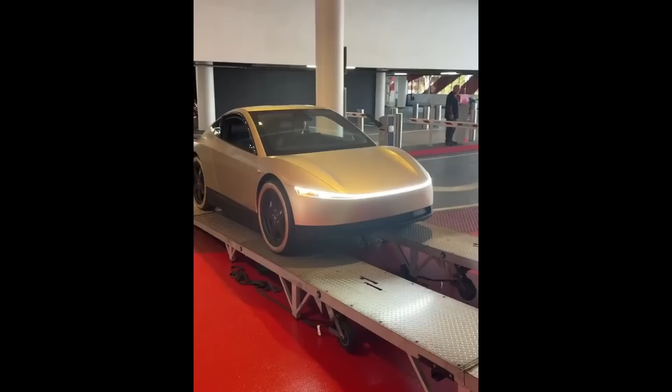Elon says Cybercabs will roll off the line every 5 seconds. That's not hype. In fact, over 2 years ago, I predicted exactly that. Just before Tesla revealed its unboxed process, I said they were about to reinvent the automotive production line, with the goal of building one car every few seconds. At the time, it sounded crazy, but one by one, those predictions were confirmed.

So how is Tesla planning to do what no car maker has done in over a century? And how can a single line outpace 12 conventional ones? Let's break it down. Now buckle up and get ready, because Tesla is about to disrupt the entire automotive industry, and disruptions are never boring.

Chapter 1. Speed is the strategy. When analyzing manufacturing systems from first principles, there's one variable that multiplies the efficiency of every other: speed. Not incremental gains, not 10% better, but a full order of magnitude change.

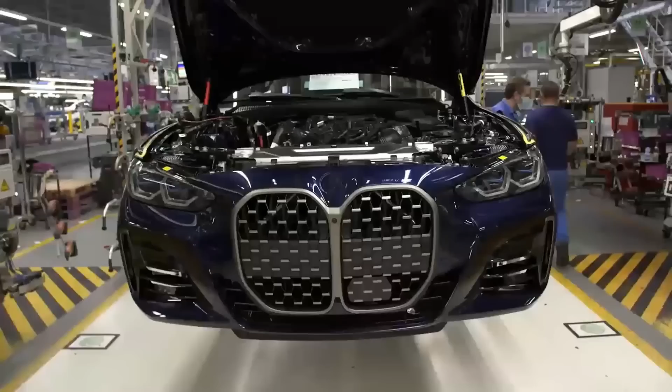In most automotive factories today, one car rolls off the production line every 60 seconds. Surprisingly, despite robotics and changes in technology, that cadence has barely changed since the days of Henry Ford. The limiting factor is the human element, because while machines can be made to go faster, people are limited in how fast they can move, lift, align, and react, without getting injured or making costly mistakes.

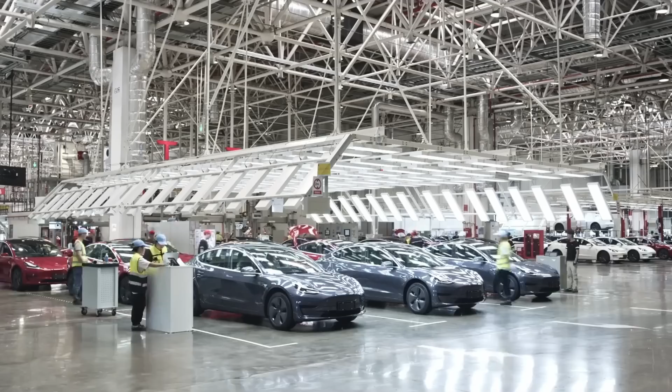Through a lot of painstaking work, Tesla already pushed past that. Yesterday, when I was being interviewed by somebody, I mentioned that a normal car production line is about a 60-second cycle. Tesla is doing a 40-second cycle in China. Well, I've been corrected. That is really a 34-second cycle for the body shop. Nobody can do that. And Giga Shanghai makes a new Model Y every 34 seconds. Nearly twice as fast as the industry norm.

But now they're going for something that sounds impossible. At a recent all-hands meeting, Elon revealed that the Cybercab line is being designed to build a car every 5 seconds. Let that sink in. That's 12 times faster than a conventional car factory. It means one Cybercab line replaces 12 traditional ones. And it raises the core question of this video. How is that even possible?

The answer starts with the architecture of the production line itself, what Tesla calls the unboxed process. Traditional factories build cars sequentially, one vehicle, moving station by station along a single winding line. Tesla threw that idea out.

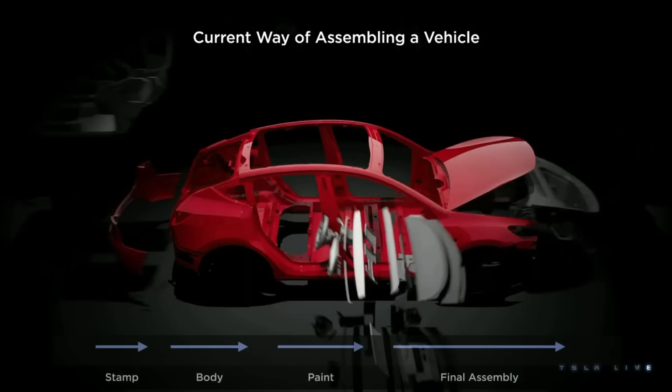There are many steps in learning, and Tesla has made several before coming up with the unboxed idea. Starting from the traditional production line, Tesla's lines are already built as a grid of adjacent cells. This enables duplicating cells and opening parallel stations for the same process. For example, when trying out a new method, a main cell can handle most cars, with just a few routed to a new experimental one. As the new method improves, more cars are diverted until it takes over completely.

With the unboxed method, Tesla pushed this parallelization to the max, not just within a cell, but across entire sections of the vehicle. Instead of building the whole car in a line, they broke it into large modules, each built in parallel inside its own production cell. One cell handles the rear, another assembles the center, a third builds the front. And it doesn't stop there. Each module is composed of sub-modules, themselves built from smaller assemblies.

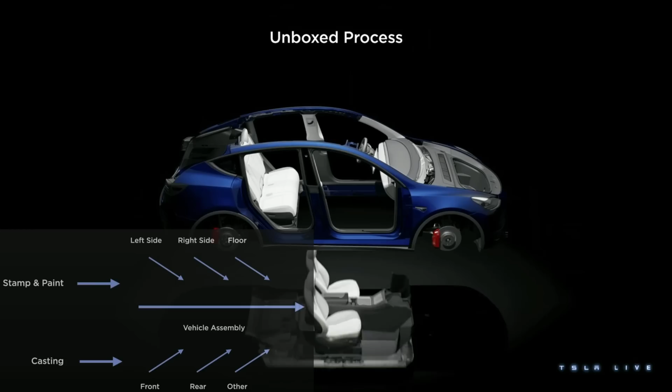At every level, Tesla applies one simple rule: only connect components at the last stage where they're needed. When a part becomes an assembly, it's tested. That assembly joins others to form a sub-module, and tested again. Sub-modules form larger modules, and tested once more. And only then, in final assembly, are all major modules snapped together, mechanically, electrically, and digitally, into a complete vehicle.

This layered test-before-merge structure makes true parallelization possible. It ensures any failed part is caught early, discarded quickly, and never holds up the rest of the system. It's no longer a line, it's a grid, or better yet, a multi-core processor.

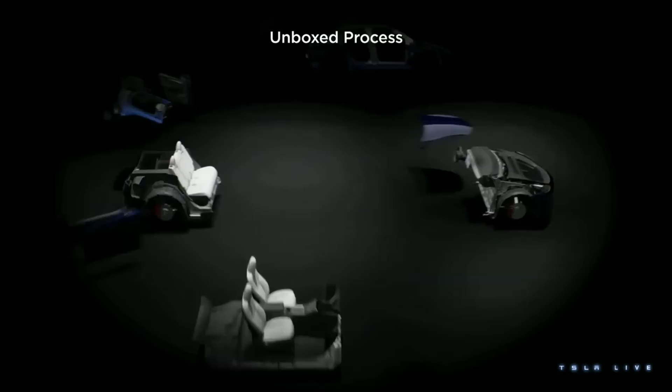Legacy factories operate sequentially like old single-core CPUs, but with Cybercab, each core builds its section independently, only returning to the sequential bottleneck when joining complete parts. That parallel architecture is what makes 5-second production cycles even conceivable, and it unlocks some game-changing advantages.

First, capital efficiency. A line that produces 12 times as many cars doesn't need 12 times the machines. That means more output from the same equipment and far lower capex per vehicle. That alone transforms the economics of EV manufacturing.

Second, spatial efficiency. Traditional plants require enormous footprints to support long assembly lines, but parallel module production shrinks the layout dramatically. Tesla can fit multiple lines into a single building, or build smaller, more localized factories worldwide. Fewer factories means even lower capex per car.

Third, quality control becomes embedded. Legacy systems test the car after full assembly. If something fails, it means disassembly, backtracking, and costly rework. In Tesla's system, each layer is validated before it moves on. A failed part doesn't enter a module. A failed module never reaches final assembly. Defects are isolated and removed without disrupting the flow.

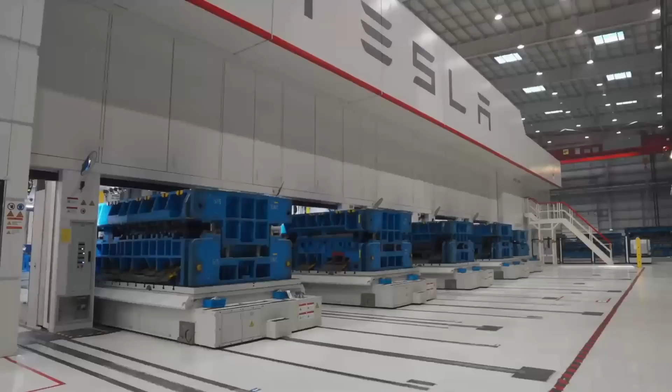And fourth, perhaps most radical, complete automation. At a 5-second pace, humans can't be involved. As Elon clearly said, the line will move so fast, actually people can't even get close to it. He wasn't exaggerating.

A human simply can't align, fasten, and inspect a structure in 5 seconds, let alone do it safely and repeatably. Cybercab's production line is being built for robots from day one, with industrial robots doing most of the work and Optimus doing the rest.

Like the parallel production cells used in Models 3 and Y, the structure allows multiple robots to test different ways of doing a job, before settling on the best method. But unlike single cells, a slow cell doesn't delay an entire vehicle, just a module or subassembly. That keeps delays localized and makes Cybercab's line an ideal proving ground for robotic labor.

Elon compared the Cybercab line to a high-speed consumer electronics line. That's not a metaphor. Electronics factories run fast, dense, and error-free. Tesla is importing that logic into automotive, something no legacy manufacturer has done.

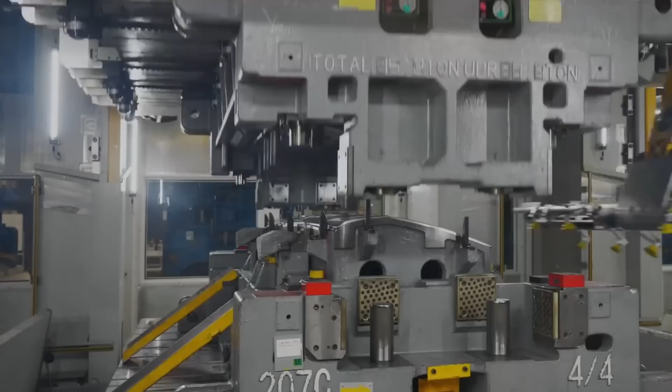For me, the 5 seconds announcement was redeeming. Two years ago, just before Tesla revealed the Unboxed process, I released a series of videos predicting they wouldn't just build a cheaper car. They'd reinvent the production line itself, aiming to roll out a car every few seconds. It wasn't out of the blue.

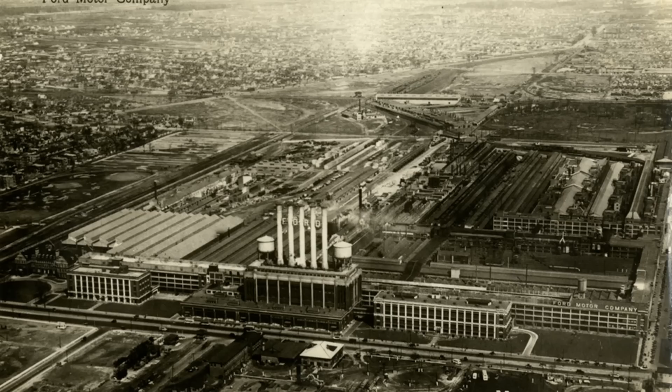One of my patrons, Scott M., sent me this: I noticed an interesting parallel between 1913 Ford's Highland Park manufacturing plant and the naming of Tesla's Project Highland. Coincidence? I think not. Elon is an avid student of history, so to me the connection seemed obvious.

Highland Park was the name of the factory where Henry Ford introduced the moving assembly line and defined how cars would be built for the next 100 years. And Project Highland was Tesla's attempt to reimagine how cars will be built for the next 100. At the time, this was a moonshot. Shortly after, it was confirmed.

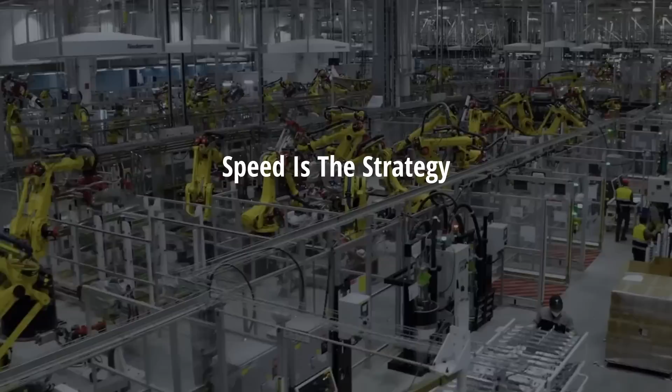With Cybercab and any car Tesla makes in the future, speed is the strategy. Because speed is scale, and scale is dominance. Every innovation we will cover in this video, from dry processes and castings to modular interiors, simplified wiring, and humanoid robots, serves this one goal: to make a car every few seconds.

The Cybercab isn't just a new product, it's a showcase for a new industrial model, one that could upend everything we know about vehicle production. And in the chapters ahead, we'll break it down piece by piece.

Chapter 2, the dry factory. When trying to speed up a process, fluids are your enemy. They require special storage, special handling, special ventilation, and special disposal. Paint, glue, hydraulic fluid, they all require time to flow, to dry, to bleed, to cure. They introduce dependencies, delays, and points of failure. And when you're trying to build a car every 5 seconds, that's a non-starter.

Tesla knows this, so I expect them to go almost entirely dry. Let's start with the most obvious: no paint shop.

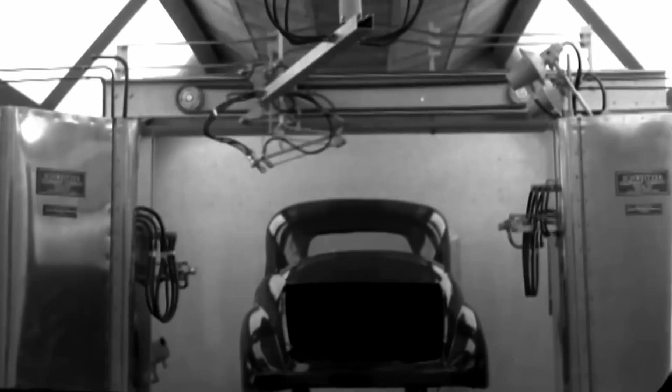Legacy automakers spend hundreds of millions building massive clean rooms to spray cars with layer after layer of primer, paint, and clear coat, each of which needs to dry before the next begins. It's slow, messy, and expensive.

Cybercab skips all of that. Instead of painting body panels, Cybercab uses color-impregnated plastic for most surfaces and leaves its massive castings unpainted. It's a radical change that slashes both cost and complexity, while opening the door for faster, more localized production.

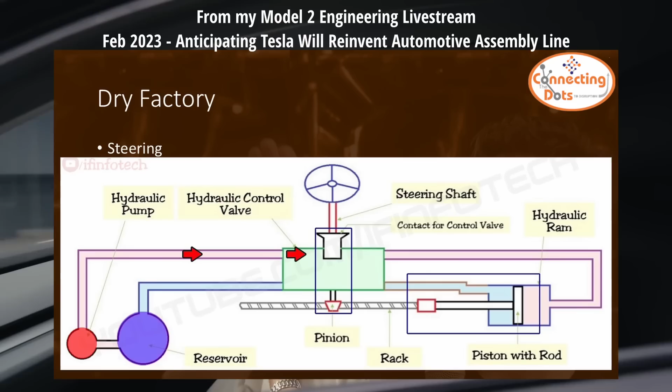Then, there's steer-by-wire. Like all Teslas and most modern cars, Cybercab will have electric steering, which consumes less energy than hydraulic steering and doesn't require steering fluid. The Cybertruck was the first vehicle in the world with full steer-by-wire without using a mechanical steering column. Instead, it uses electronic signals to control the steering angle, with variable ratio assistance that adapts to speed and driving context.

Cybercab builds on this. As an autonomous car with no steering wheel, steer-by-wire is the only option. But in Cybercab's case, even if it had a steering wheel, they would have still used steer-by-wire. Because with steer-by-wire, there's no need for a steering column, no firewall cutout, no mechanical interface between the front module and the rest of the car.

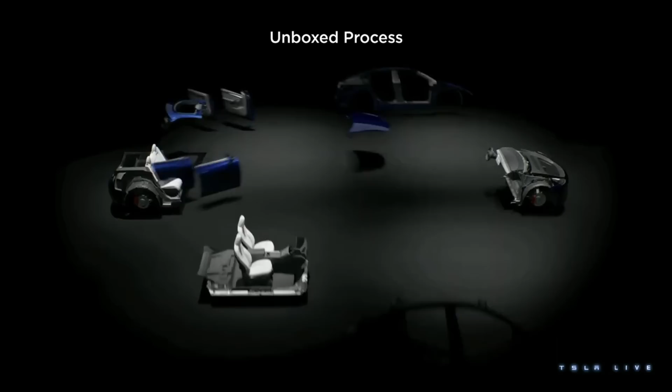That's not just elegant, it's essential. It means the front can be developed, built, and tested as a separate module, with nothing tying it to the center or rear. Removing dependencies between modules is the very essence of unboxed modularity.

Brake-by-wire follows the same logic. Tesla hasn't released many details about Cybercab's braking system, but Lars Moravy confirmed that brake-by-wire is already being used on the new Model Y. We have a pedal simulator in the front here, which is kind of like a traditional master cylinder.

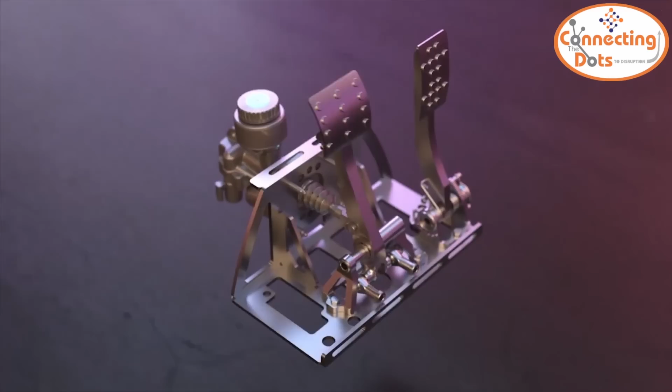When you're pushing the pedal, you're pushing straight into a master cylinder, and then we have a spring pack that we can calibrate to give you a nice pedal feel. But the brake pressure is not actually going to the wheels like in a traditional system. Instead, we read the pedal stroke and then send a signal to our ECUs, which then create pressure requests that we create on the front calipers here.

Now the way we do that is with electro-hydraulic actuators, and they basically have a little piston that pushes in and replicates what you would normally be doing, which is the master cylinder pushing pressure straight to the wheels. So it decouples the driver from the wheels, which allows us to do a little more control, and it also gives the driver a very consistent feedback from the pedal and a very comfortable feedback.

The car uses a hybrid setup, with local hydraulic actuation for familiar pedal feel. But for Cybercab, a car with no brake pedal and no need to match the slowing with brake pedal feel, there's no reason to keep even that.

This is really interesting because this is taking it even a step further. So not only is the driver decoupled, but you're in a situation where you have no hydraulic fluid in the back. They're electromechanical, and it's just a motor that pushes in a piston, and that puts the brake pressure on the wheel. So this is really good because now you're not running any hydraulic fluid, there's no bleeding process to do.

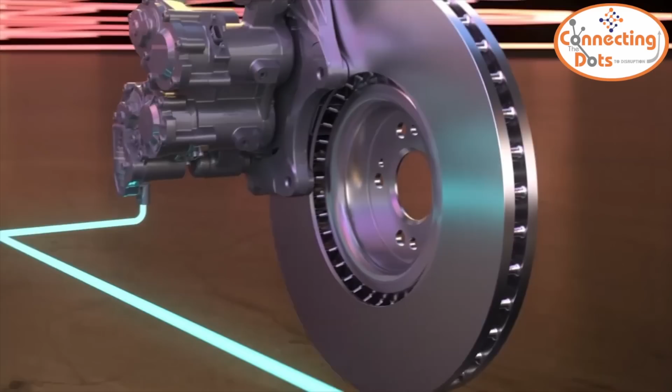We can integrate your parking brake directly into that system. Very compact, very easy to package, but then you still get the individual actuator control on every single wheel. So again, two controllers back here, two controllers up there. You're gonna get the best possible control and best feel out of the vehicle.

Lose the hydraulics, and you lose the need to bleed lines, calibrate manually, or stretch hydraulic lines along the car. Each section of the car becomes a self-contained module. You build it, you test it, and you plug it in. No leaks, no mess, no waiting. So no paint, no steering rack, and no brake pedal.

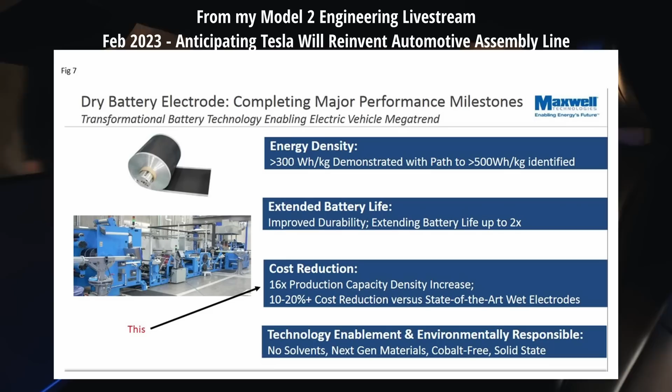But dry factory doesn't stop there. Tesla is also going dry inside the battery. Their new dry electrode process eliminates the solvents used in traditional battery cathodes and anodes. Moreover, it eliminates the drying time and space required after using these solvents. The dry battery electrode process is not only a win for the environment, it shortens production time, shrinks factory footprint, and enables Tesla to produce battery cells in a fast, clean, and scalable way.

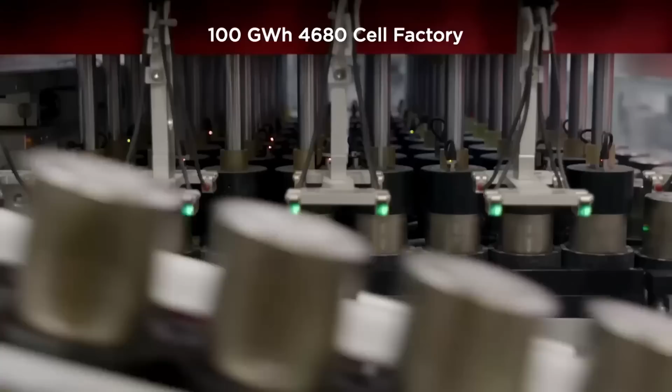In traditional processes, battery slurry, made from active material, solvent, and binder, is coated onto metal foil and then dried in huge ovens that can span tens of meters and consume massive energy. Tesla's dry process, inherited from their acquisition of Maxwell Technologies and further developed by Tesla, instead compresses powdered materials directly onto the current collector via a roll press.

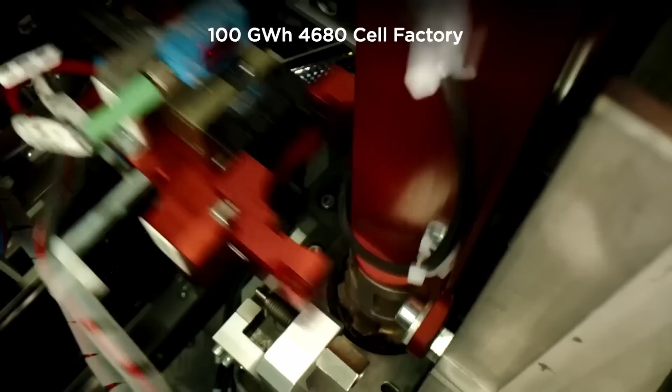No solvent, no drying, just roll, cut, stack. It allows cell lines to be shorter, faster, and far easier to scale. We'll discuss castings in the next chapter, but they too are part of the dry factory, because having one large part replace dozens of small ones joined together saves a whole lot of glue and sealant, along with their drying times.

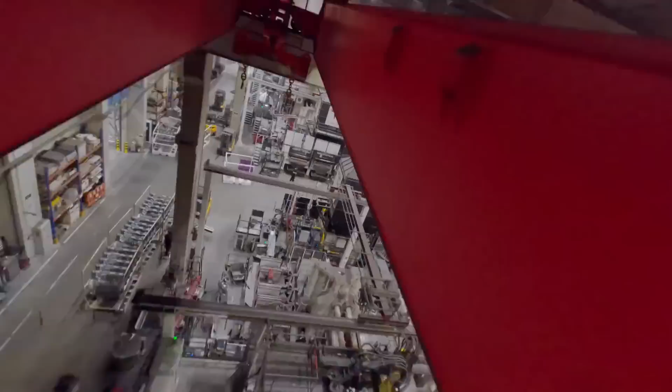Once I predicted Tesla would reinvent manufacturing, it was clear that the goal was speed. Knowing workshops and going by first principles, the first thing that stood out was fluids are slow, dry is fast, and stretching hoses along the car is tedious.

Let's see how it turned out. This isn't a victory lap, just a quick check on what I got right, what I got wrong, and what we're still waiting on. No paint, confirmed by Lars and Franz.

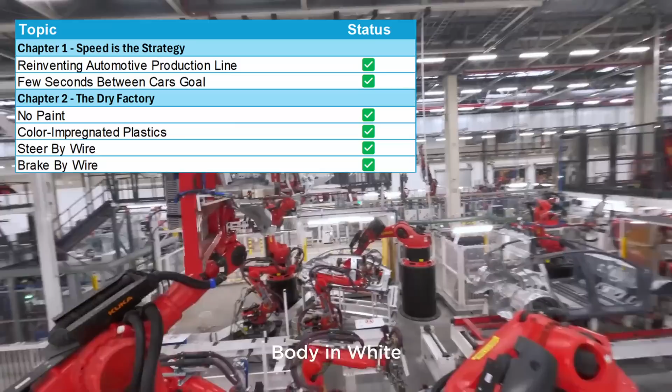Color-impregnated plastics, also confirmed. Steer-by-wire, shown on Cybertruck and essential for a car with no steering wheel. Brake-by-wire, confirmed on new Model Y, and with no pedal in Cybercab, it is a must.

Dry battery electrodes, Tesla nailed cathodes, and anodes are coming. Fully dry brakes, still a maybe. We'll discuss castings in the next chapter, as they serve far more than just dry factory.

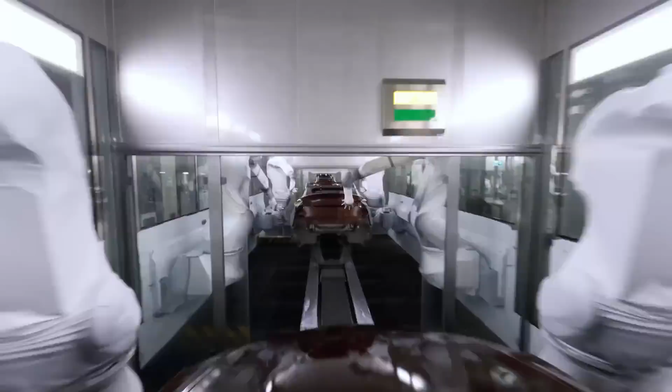While going dry removes critical bottlenecks from the production process, achieving the 5-second goal takes far more than just removing fluids. For that, Tesla had to fundamentally rethink how the car itself is constructed, starting with its very skeleton.

Tesla used Cybertruck to validate new technologies for Cybercab, and Cybertruck is now having a recall. Recalls are common, but without adding, for example, that the F-150 Lightning already had 3 of them, media outlets just tell stories to fit their agenda.

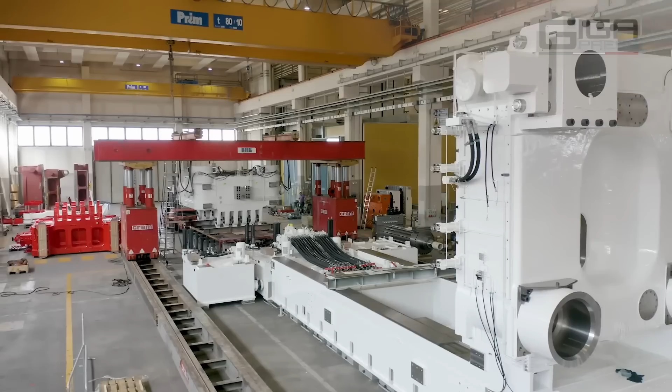Each casting replaced around 70 stamped and welded parts previously used to form that part of the chassis, along with eliminating the processes involved in making and joining them together. That innovation soon evolved into a single-piece rear GigaCasting, unifying the entire rear structure into one massive aluminum element. Later, Tesla added a front casting to replace much of the subframe and shock tower region.

The front casting appeared on Model Y and spread to the Cybertruck, but on the new Model Y, Tesla stepped back and removed it, reverting to previous methods of making the front structure.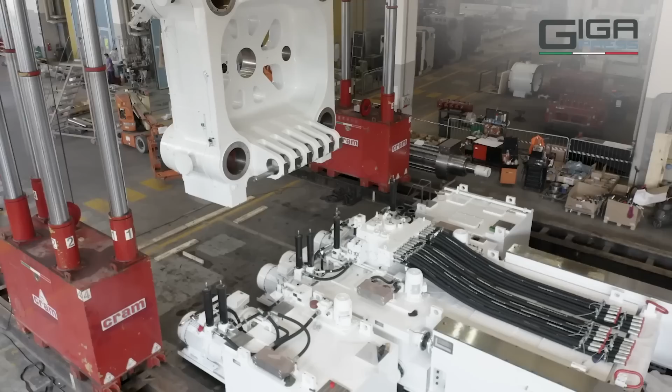But if Model Y ditched its front GigaCasting, will Cybercab use one? I think the answer is yes, and for 3 reasons. First, Model Y dropped it not because of limitations in performance or manufacturability, but simply for commonality. Not all Tesla factories had front gigapress capacity, and rather than maintain separate production processes, Tesla chose to standardize.

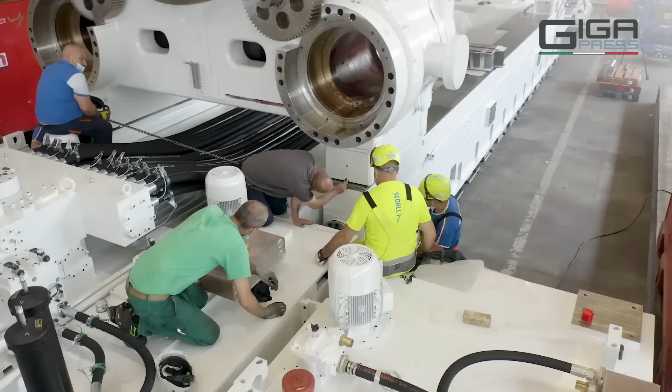That constraint disappears with a clean sheet program like Cybercab. Second, in an unboxed production system, each casting isn't just structural, it's the foundation of a standalone module.

With high-precision castings, the casting itself can serve as a jig for the entire module, eliminating the need for expensive production jigs. And third, and most importantly, casting is simply much faster. Compared to stamping, aligning, welding, gluing, and sealing dozens of smaller parts, a single-shot casting is dramatically quicker. It also saves factory space, requires fewer robots, and most of all, saves time.

Tesla isn't just building faster cars. They're building cars that can be built faster, and these castings are where it starts. But front and rear castings are just the beginning, because even castings can be improved.

As Elon said at the all-hands meeting: 'And we rock at castings.' 'We do.' And if so, what's next?

Can you imagine a car coming off the line in less than 5 seconds? That's like, whoa. Which means casting's got to happen fast. Tesla is making the casting process itself faster, cleaner, and smarter.

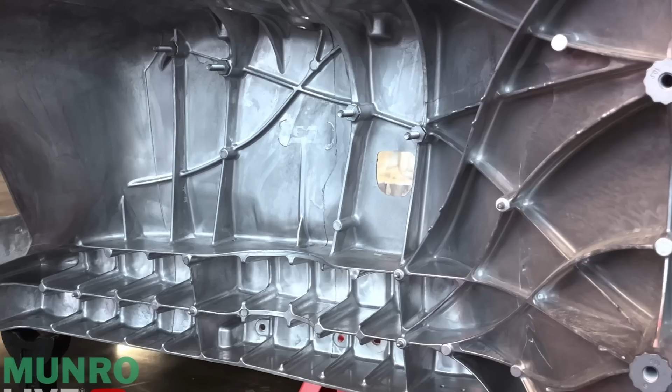And I see two main improvements arriving, the first of which we already saw with Cybertruck. Tesla is reshaping how the metal flows inside the mold. Using in-house developed software which combines structural analysis of the final casting with computational fluid dynamics for the molten metal, they redesigned the flow channels and internal ribbing of the die itself.

The result? Instead of old-school rectangular ribs and blocky transitions, Tesla's castings now feature organic, flowing structural patterns, shaped to enable easier flow of the liquid metal.

This change does two key things. It reduces turbulence and voids during injection, and it enables larger, more complex parts to be cast using smaller, lower-pressure machines. That may sound minor, but it's a breakthrough.

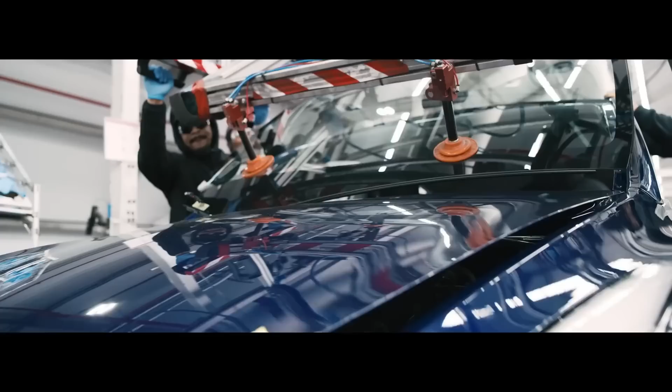Instead of scaling brute force, Tesla scaled fluid dynamics, and the benefits go far beyond part geometry. Smaller die casting machines take up less factory space. They're cheaper to buy, easier to install, and reduce capex per vehicle. They're made by more suppliers, not just IDRA, so they're easier to procure and scale.

They consume less energy, lowering production costs. And perhaps most important, they cycle faster. Smaller machines typically have shorter stroke lengths, lower thermal inertia, and faster reset times. That means less delay between shots and more parts per hour.

So even if Cybercab's parts are physically small, the benefit of using smaller, faster machines is massive. It's a classic Tesla move: optimize the bottleneck and then build around it.

Now let's focus on the cooling, because that's where the real speed unlock happens. Casting's got to happen fast. So I mean, we got to jam the liquid metal in, cool it down real fast, like real fast.

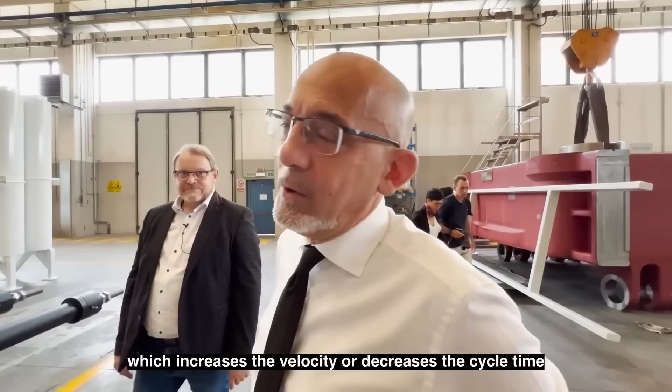In a tour of the IDRA factory, one of the engineers told Sandy Munro that Tesla was attempting to improve cooling speed. And it wasn't just talk, because in a later factory tour, 2 gigapresses were spotted, each with a different cooling stack above it. One original, the other an experimental Tesla-developed stack with which they experimented on achieving much faster post-injection cooling.

And that makes perfect sense, because if you want a car every 5 seconds, you can't have a part sitting for 45 seconds just to cool off. The entire cycle needs to shrink, and for that, thermal control is king.

This is where Tesla truly shines. From its experience with battery packs and EV heat pumps, to the 3D cooling they developed for Dojo's chips, Tesla has become quite a world leader in liquid cooling solutions. So applying those skills to aluminum castings?

Hold our beer. Tesla is likely doing 2 things here: actively managing the heat draw from the mold using liquid-cooled channels embedded around high-temperature zones, and reclaiming part of the thermal energy to preheat or even melt the aluminum feedstock for the next cycle. Instead of wasting heat, it's a sure bet that Tesla loops it back in, a thermal feedback loop for casting.

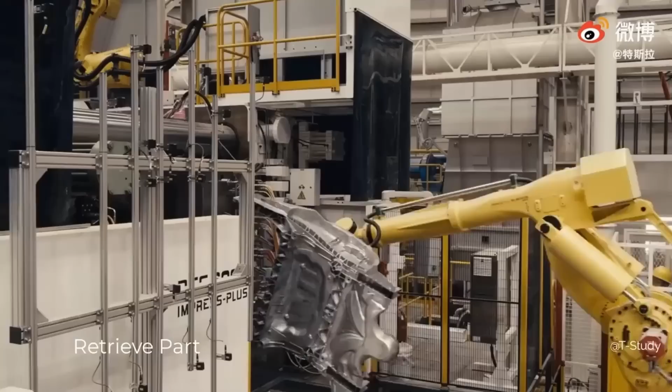Which takes us to simplifying. Casting isn't just about what happens inside the mold, it's also about how these giant metal pieces are extracted, and what happens until they are used in a subsequent station.

In previous videos, I showed the robotic dance between extracting, trimming, inspecting, and transferring, and noted that, although this was sufficient for the current factory speed, if Tesla moved to a car every few seconds, they will likely reduce the required post-processing, and will have to simplify the process so that each arm performs no more than a single move, immediately freeing it to handle the next part. And Tesla seems to agree.

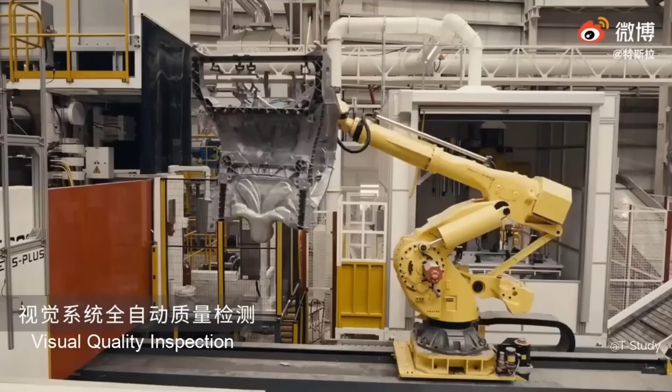Lars Moravy recently confirmed that the post-casting processing on Cybercab has been significantly reduced. For 5 seconds per car, there's no way a single arm would be used for so many steps. So instead of having robot arms shuffle castings between multiple stations, Tesla may now combine those steps, casting, cooling, cleaning, inspecting in one continuous motion.

Then there's the upper chassis. Before Tesla's 2023 Investor Day, I predicted that Tesla would cast, forge, or mold the top half of the car in composite form, embedding wiring, skipping paint, and radically simplifying roof and pillar assembly. Turns out, that prediction landed pretty close. Lars later confirmed that Tesla is casting the upper chassis, but instead of a single large top hat, they are making two composite castings, one for each side, connected afterward. Why two instead of one?

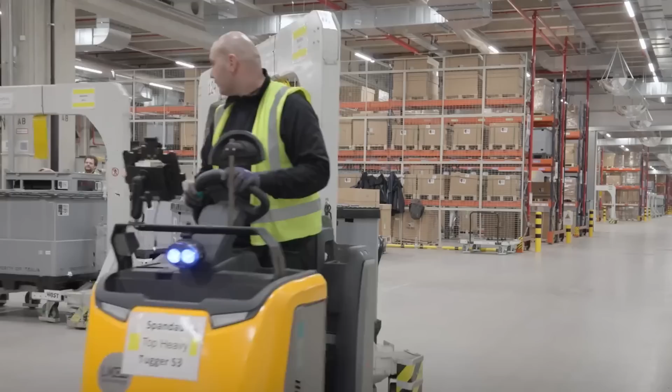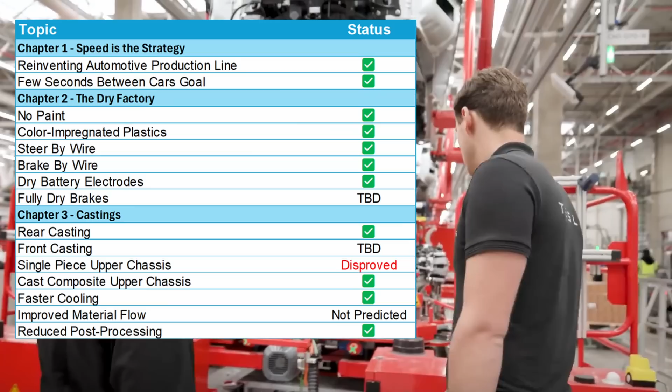This one I didn't predict, and hats off to Tesla. Reduced post-processing, confirmed by Lars. Tesla has reduced the steps required after casting. Heat reclaim, still unknown, but a very likely optimization based on Tesla's track record. Simplified robot movement, still unknown, but also a very likely optimization based on Tesla's track record.

Tesla isn't just scaling castings. They're recasting the role of casting itself. They started as simpler, more precise alternatives to hundreds of parts and processes, but they continue as a major enabler of speed and of robotaxi's global scaling.

Chapter 4: Snap Fit Car. If castings are the bones of the Cybercab, then its real breakthrough lies in how everything else connects. Because in traditional car factories, assembly is construction, hundreds of pieces coming together, layer by layer, in a long, slow sequence. But with Cybercab, assembly becomes something different. It becomes integration. That's the real genius of the unboxed approach.

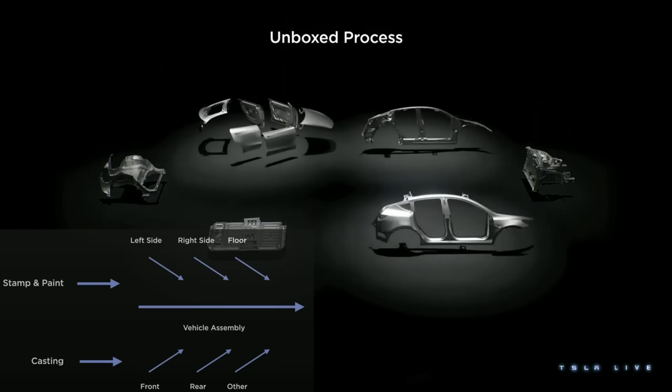Rather than building the car one step at a time, Tesla builds it like a computer, modular blocks developed and tested independently, then snapped together in one final step. Each major system in the car becomes a self-contained module.

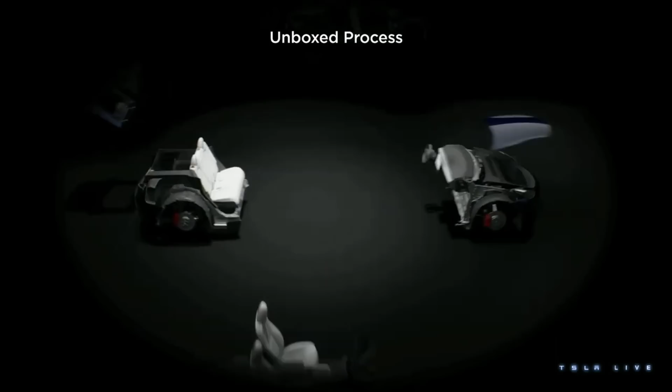The battery is no longer just an energy source. It's a structural floor with embedded cooling and high-voltage distribution, and it holds much of the interior, such as carpeting, seats, center console, and HVAC, pre-installed and fully tested. The front and rear castings serve as drop-in motor and suspension units, with mechanicals, electronics, and thermal systems already integrated. The roof panel should arrive fully trimmed, wired, and sealed, with no need for extra brackets or secondary alignment steps.

Each module is built in parallel, each one is tested on its own, and each one adheres to a strict known interface. Only after they're independently tested do they come together at the merge station, like IP blocks in a chip layout, forming a single unified system. That final assembly isn't construction, it's convergence, and it only works because Tesla pre-designed the interfaces.

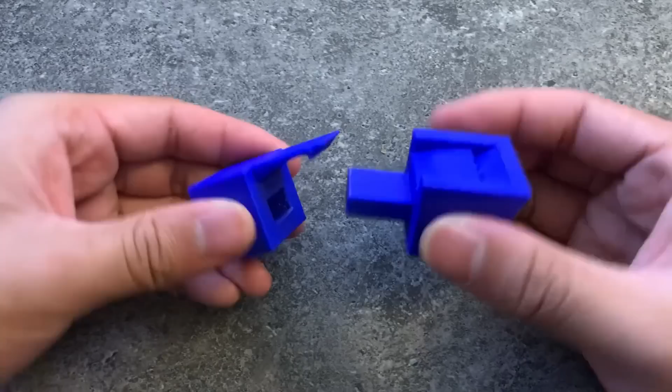Rather than dealing with bundles of cables, scattered bolts, and human-guided alignments, Tesla designed Cybercab's modules to connect via snap-fit mechanical and electrical interfaces. Predetermined hardpoints align each module to within millimeters, and as parts are brought together, they automatically lock in place. High voltage and data connectors engage automatically as modules click into place. Fastening is handled by robots. While Model Y requires hundreds or even thousands of welds, fasteners, sealants, and structural adhesives, Cybercab uses just enough to lock modules in place, trusting precision and repeatability to do the rest.

This architecture opens something new: parallel quality assurance. Because when each module is complete and testable on its own, Tesla no longer needs to wait until the car is fully assembled to check for defects. Each system, drive, thermal, electrical, structural, can be verified in isolation. All that's needed is to plug into the power and data sockets, provide power and data, and check the module's performance.

All this is performed at an early stage, in parallel to other modules and subassemblies. And since failures are caught early, they don't cascade. A bad harness in the front module doesn't hold up the interior or the rear. Everything is modular and swappable, and with tight manufacturing tolerances, the modules don't just fit, they self-jig.

The casting becomes the fixture, the battery becomes the floor, and everything else aligns from there. This makes robotic construction so much easier, even without humanoids. Because when parts self-locate and click together, you don't need a line of workers nudging, tightening, or correcting alignment. You need simple robots that can insert, engage, and move on.

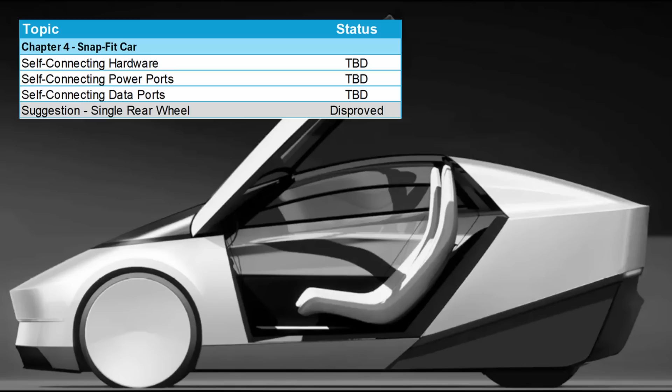Based on early Cybercab concept images which showed an inboard rear wheel, I suggested the possibility that Cybercab will have a single wheel at the back. This was just a suggestion, not a prediction, but clearly it was wrong.

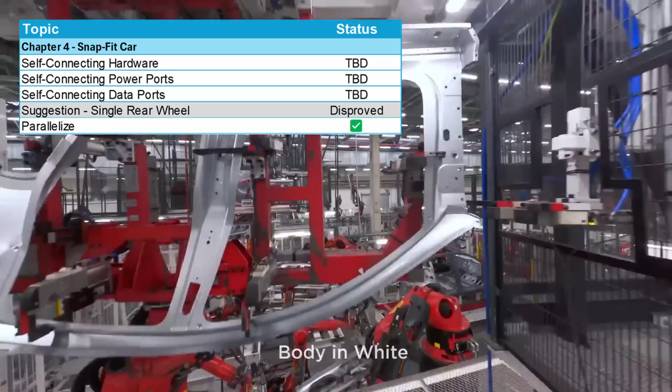And I correctly predicted that Tesla will reduce dependencies and embrace parallelization. But I wasn't nearly bold enough, as the unboxed process is far more parallelized than I had imagined. So kudos to Tesla for their engineering imagination.

And with that, let's move to the interior. Chapter 5, the central module, an interior revolution. The unboxed construction method has the car built in 3 independent modules: front, center, and rear. The center module is built on top of the battery pack and contains most of the occupant's surroundings.

There's a good chance you already know the familiar features, such as mounting the carpeting and seats directly on the battery pack. So let's jump to more exotic elements, starting with the seats. Tesla has filed several patents over the years aimed at simplifying and optimizing seat design, and 2 of them are particularly relevant. First, Tesla's skin foam architecture for seating.

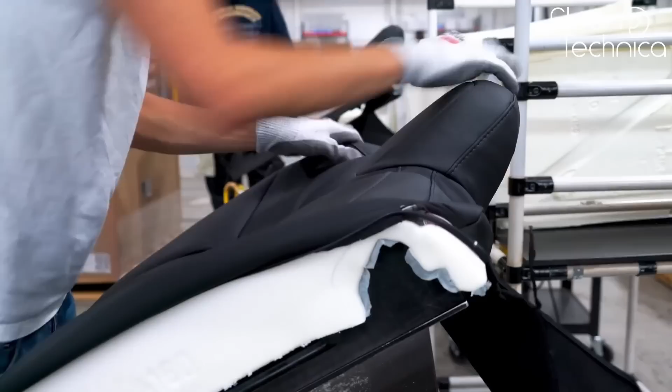In a typical car, each seat includes a frame, layers of foam, and a stitched outer cover. Fitting them together is very labor-intensive, and in high-volume manufacturing, labor equals time, and time equals cost. Optimus can replace human workers and do this work without tiring. But the best process is no process, and Tesla found a better way.

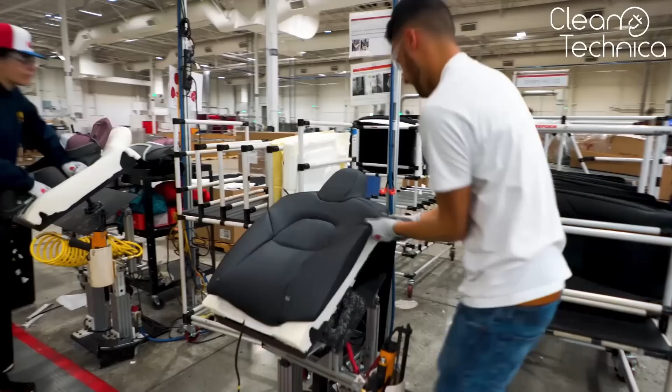Tesla's patent combines the upholstery and foam in one step. The outer skin is placed into a mold shaped like the final seat. Foam is then injected or expanded behind it, adhering directly to the back of the skin and forming a single integrated structure. No stitching, no wrapping, no manual alignment. The result is a clean, minimal single-piece seat that cuts parts, weight, variability, and speeds up build time.

But will Cybercab use it? I haven't seen the seats in person and nobody commented on this, so for now, it's to be determined. And I don't have the manufacturing and durability data required to seriously predict whether Tesla will use it. As a gut feeling, however, unless curing takes too long, I think they will. The potential for production time savings is too big to dismiss.

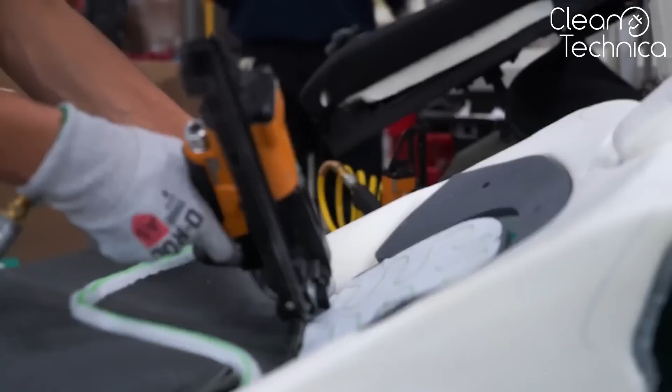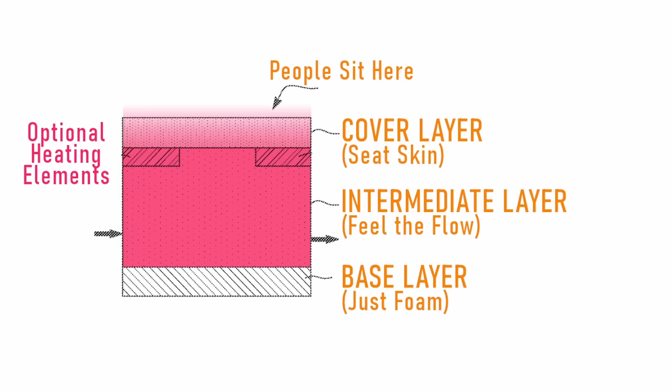Now for Tesla's heated and cooled seat patent. Most heated seats use resistive wires embedded in the seat cushion, and seat cooling typically relies on ventilation fans under the cushion, which is better than nothing, but uneven and noisy. Tesla proposes a liquid-based heating and cooling loop embedded in the seat. Heated or cooled liquid flows through an internal layer in the cushion, delivering thermal comfort directly to the occupant, much like resistive wires. It's quieter, more consistent, and more efficient, important for EVs.

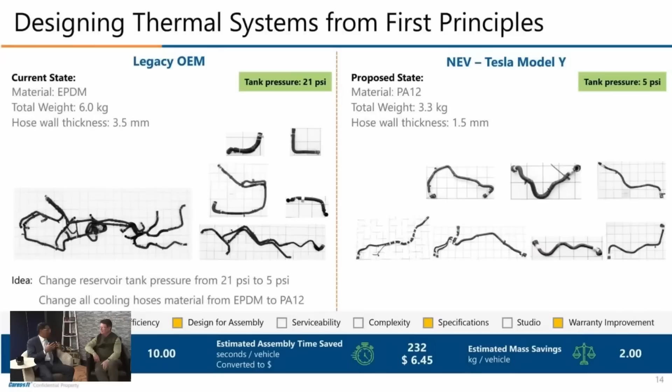Again, no confirmation yet. The seats lack perforations, which suggests no ventilation fans, but liquid-based contact cooling could still be used. Since Cybercab seats sit above the battery, fixed in place, a self-contained thermal loop could make perfect sense, especially if integrated with the main thermal system and octovalve, enabling near-free heating or cooling. An autonomous Cybercab has different needs than a private car. With no driver, the cabin is no longer shaped by traditional controls.

That means no steering wheel, no turn signal stalk or buttons, no pedals, no mirrors internal or external, no rear window, and no driver's display or heads-up display, because why should the left side passenger get more displays than the passenger on the right? All of these are gone in recent prototypes, and Tesla also removed the glass roof.

Removing these is more than a cost decision. Some changes also save weight and even lower aerodynamic drag. More important for Cybercab, however, is that ditching these items shortens production time, lowers factory space requirements, and reduces dependencies between the car's modules. Let's briefly check what I got right and what I didn't.

Predicted no steering wheel, pedals, or mirrors, and these were confirmed. No rear window, also confirmed, and Tesla also ditched the glass roof.

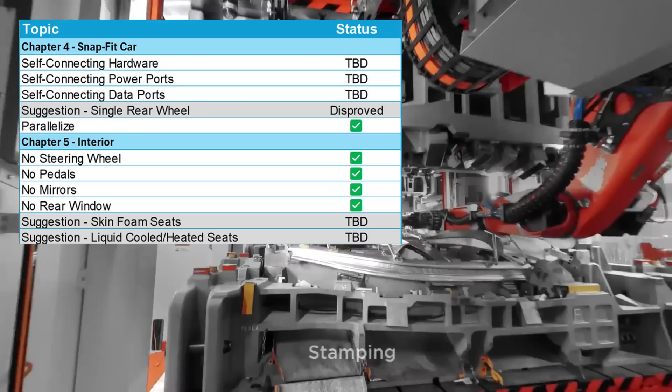Skin foam and liquid seat cooling weren't predicted, just flagged as possibilities, and in both cases we'll have to wait and see. As for a heated or cooled frunk for food delivery, I suggested it as a possibility, feeding straight from the thermal management system. But Tesla skipped the frunk entirely.

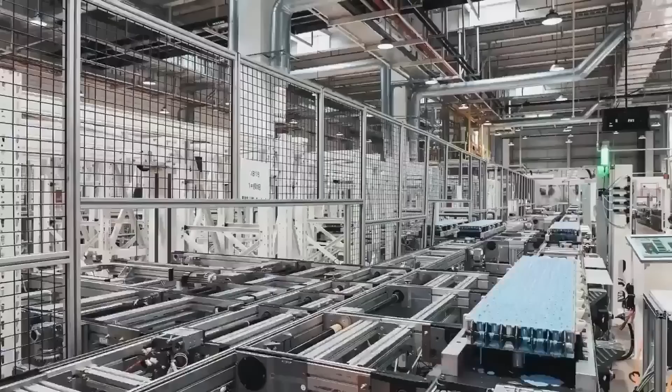Chapter 6. The Nervous System. When cars became electrified, most people focused on the batteries, motors, or sensors. But when you break the car into modules and build it without humans, one of the most disruptive changes happens quietly, behind the scenes. The wiring.

For hyperfast production, the wiring harness can't be an afterthought. It has to be modular, testable, robot installable, and fast. You can't test a module if its wiring depends on another module, and you can't install a harness by hand in a factory with no humans. So Tesla had to redesign the nervous system from the ground up.

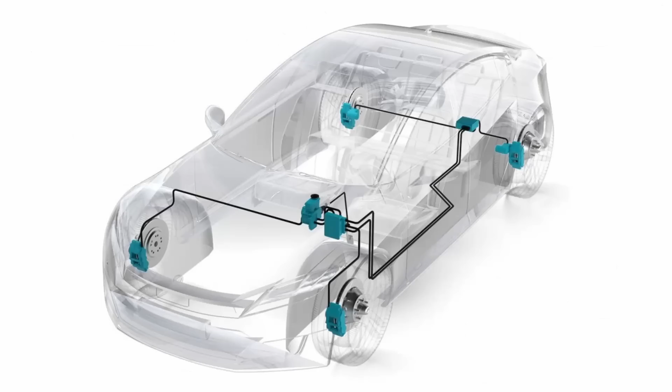Each Cybercab module, front, center, and rear, is electrically self-contained, with a local wiring harness, local power and signal connections, and local control systems. Modules connect via standardized power and data ports that snap together in final assembly, mechanical and electrical integration happening simultaneously. This isn't just convenient, it's essential. Each module can be powered and tested before joining the rest. That's what makes parallel production and test before merge possible.

Cybercab likely uses a zonal architecture, something Tesla has already started adopting. Each zone has its own compute and I/O, communicating via a central data backbone using fast automotive Ethernet. The zonal controllers handle local data and actuation but aren't autonomous. High-level decisions remain centralized. FSD manages driving, the vehicle controller runs the rest.

Zonal wiring means shorter runs, faster installs, and better fault isolation. In a modular layout, that independence is even more critical. Instead of running bundles of wires from every switch and sensor all the way to a central controller, each zone, front, center, rear, has its own local compute and I/O.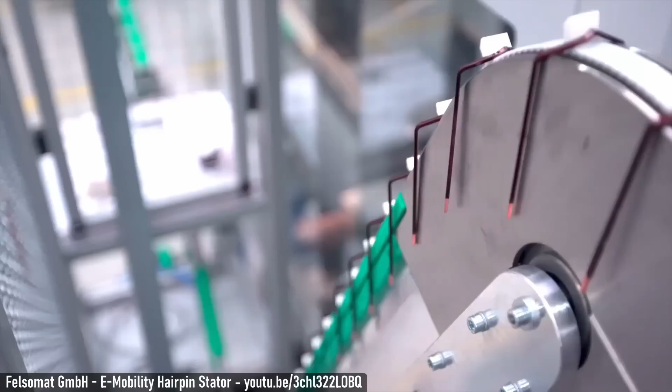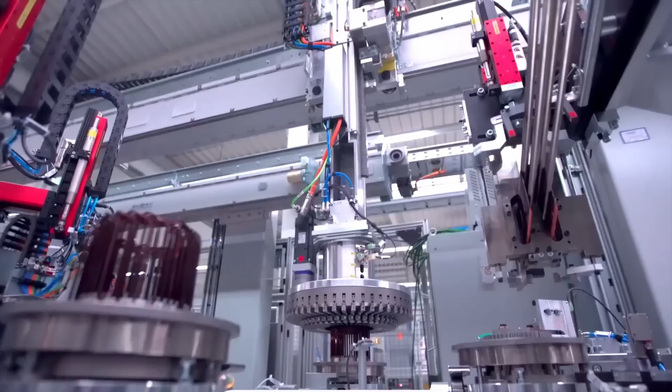Traditional harnesses are bulky, manual, and human-centric, snaking through the car with clips and brackets. Wires also dangle, which used to be a real problem for industrial robots, which expect everything to be at exactly the right place. Tesla tried to combat this by using rigid wires, and Optimus won't have a problem with danglers anyway. But I don't see even that happening because wires are the old way of doing things.

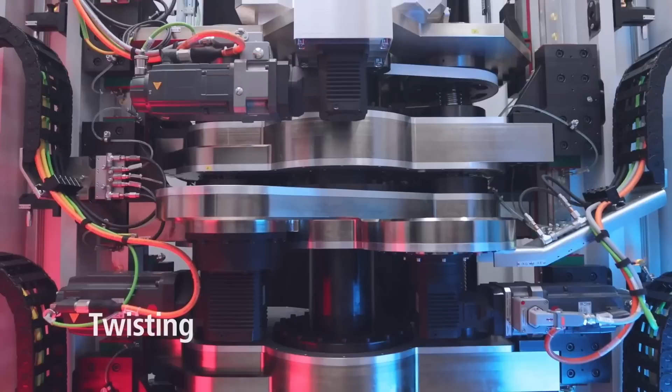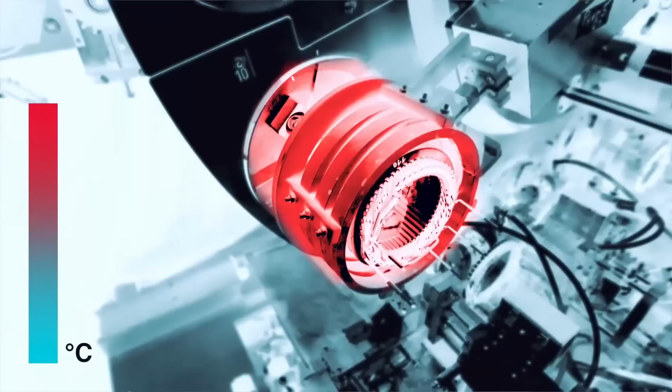Cybercab's harnesses can be flat and pre-routed, like cable trays or printed structures, attached to structural parts like castings, trim, or flooring during subassembly, clipped or bonded automatically with no manual fitting, modular and swappable, with minimal routing between sections. We've already seen signs of this in the Cybertruck, which uses flat wiring in some areas. The Cybercab could take it further.

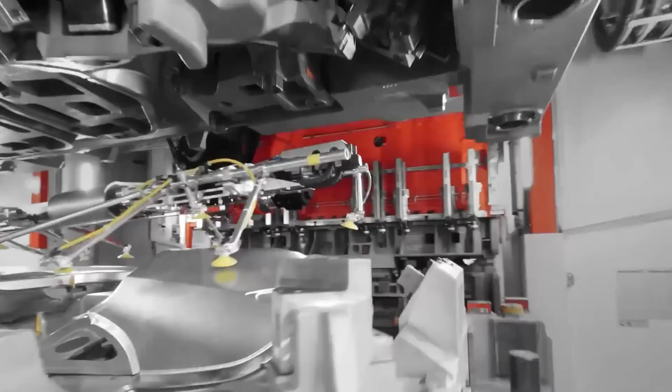Most cars today still use a 12-volt system to power actuators, lights, and ECUs. That's a legacy of a time when vehicles didn't need to move dozens of motors at once. But in a vehicle where everything is automated, from doors to HVAC vents to steering and braking, power demand skyrockets. The shift to 48 volts enables supplying more power while reducing copper usage, cutting weight, and shrinking wiring cross-sections. Cybertruck has most of its actuators running on 48 volts, but with Cybercab, it is safe to assume that everything will run on 48 volts, including all actuators.

Quickly going through my predictions, I predicted a wiring architecture designed for robots, modular installs, and early testing. Confirmed: flat wires, confirmed on Cybertruck. Molded in wiring probably won't happen. And I missed the 48-volt transition, but in hindsight, it was obvious.

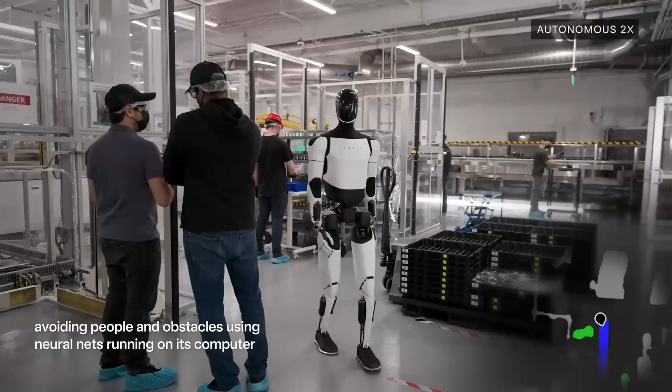Chapter 7: Robots building robots. In most factories, the biggest bottleneck isn't the machinery, it's the humans. For over a century, car factories have evolved, but only up to the speed that people can work safely. You can add robots and upgrade them, add sensors and streamline stations. There are many levers you can pull, but if there's a person in the loop, you're limited.

Tesla's answer? Take the human out of the loop entirely. Elon has already said it clearly: humans won't be able to come near the Cybercab line. That's not hyperbole, it's a statement of intent. From day one, Tesla intends to staff the Cybercab line with Optimus humanoid robots. And I don't mean prototypes, I mean production tools.

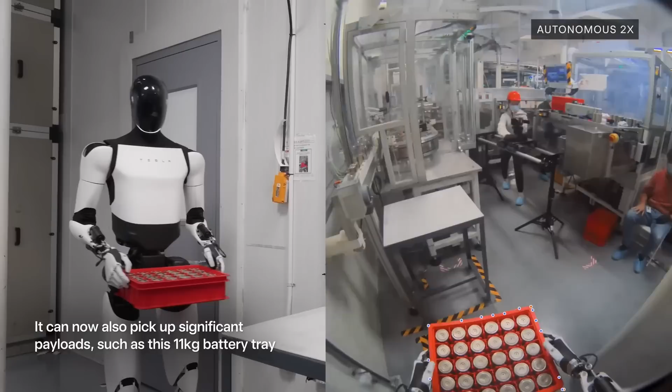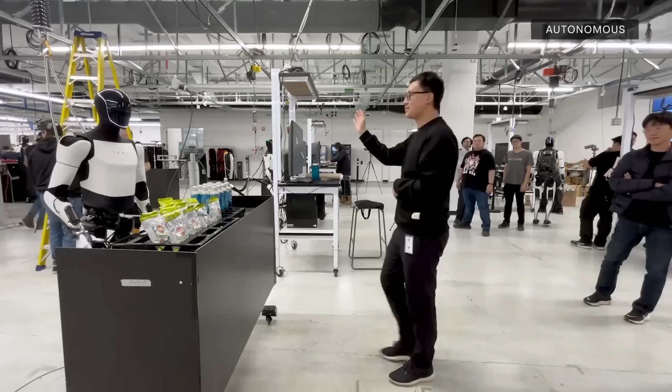It's not that Optimus will necessarily do everything immediately. In the beginning, the line will likely start slowly and ramp gradually. So there's a chance some stations will still be handled by people for a while, but these should be few, if any. Human engineers will certainly oversee, fine-tune, and manage the process, but the direction is clear: Tesla is building a factory where Optimus is the line worker.

This changes everything. Unlike humans, Optimus doesn't need breaks, lighting, or ventilation. It works almost 24/7, it doesn't tire, doesn't need training breaks, doesn't vary in performance from shift to shift, and it can learn to work faster and faster. The result is constant throughput, consistent quality, and predictable operation.

And more importantly, it sets off a powerful feedback loop. The more Optimus robots work on the Cybercab line and the better they get, the more Cybercabs Tesla can build and the cheaper Cybercabs become. But at the same time, the more Optimus works and the better it gets, the closer it is to a ramp of its own, a ramp where Optimus is the product sold to a gazillion external companies.

It's a flywheel: an army of robot workers growing better and better at producing four-wheeled autonomous robots that will flood the streets of cities worldwide. And an army of robot workers growing better and better at doing productive work, paving the way to external sales and flooding global factories and then homes worldwide.

My prediction on this front is that Optimus will be the biggest product of all time, by far. Nothing will even be close. I think it'll be 10 times bigger than the next biggest product ever made, like that level.

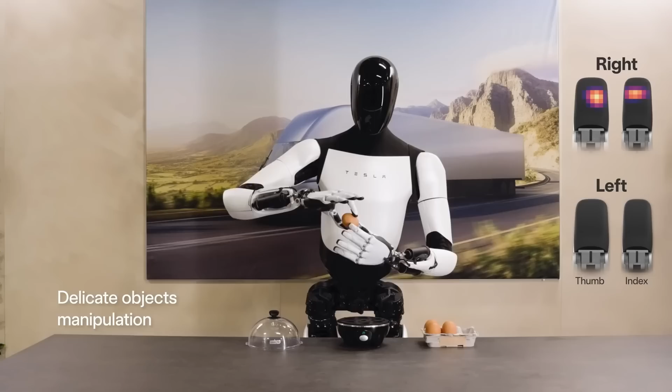When I made the Model 2 video a year ago, I expected people to say I was too bullish on Optimus. Back then, Tesla showed it barely folding a shirt and holding an egg, teleoperated. It felt like useful factory work was still far off. To back my optimism, I pointed to Tim Urban's exponential curves: at first progress takes forever, but shortly after the robot can do monkey tricks such as folding that shirt, there's a hockey stick and it's suddenly superhuman.

Still, I had doubts. Could they really staff a whole line by mid-2025? A year later, those doubts are gone. The progress in robotics over the past 12 months was faster than even I expected. With the arrival of multimodal LLMs, teaching a task went from days of hands-on training to simply telling the robot what to do, just like onboarding a new human hire. So yes, I had doubts, but not anymore.

And if Tesla can pull it off, this becomes much bigger than Robotaxis. The new Model Y may end up being the last car Tesla builds with its own hands, because after this, the robots are ready to build everything else. It's the long-awaited arrival of the alien dreadnought, but this time, it's no longer a metaphor.

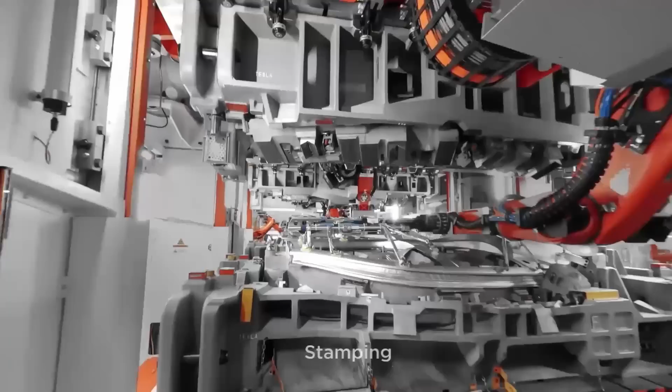So how well do my predictions fare? A year ago, I predicted a fully or almost fully automated factory from day one. While Elon's recent comments hint that this is the plan, we'll have to wait for production to start to know whether I was right.

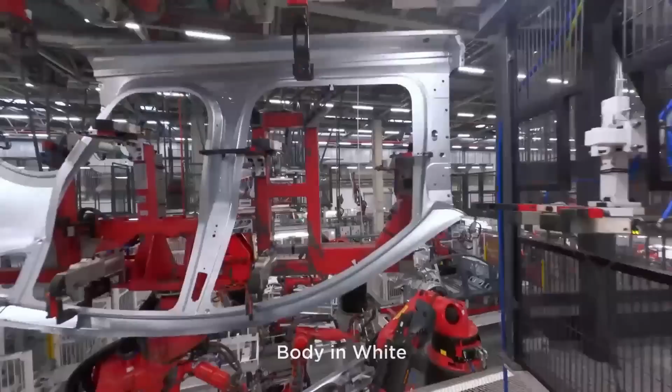Chapter 8: This changes everything. Tesla didn't just redesign the car, they redesigned how we build cars. With Cybercab, we're witnessing the birth of a new production model, one that leaves legacy automakers not just behind, but playing an entirely different game. Because fast factories don't just make cheaper cars, they break the math of the industry.

Faster means cheaper. Fewer seconds per car means fewer workers, fewer tools, and less floor space. Faster also means less capital per vehicle: if the factory outputs more cars with the same equipment, the cost of that equipment gets spread thinner. And faster means easier global expansion. If the footprint is small and the cycle time is short, Tesla can replicate the system anywhere: local factories, local materials, local delivery. And with humanoids, you don't even need to train a local workforce.

Because from day one, your most expert workers will staff all stations in every production line worldwide. Cybercab isn't just a product, it's a template, a blueprint for how to build vehicles in the age of AI, and a proof point for a platform that scales. They are building the factory, and they are building its workforce, and it's a vertically integrated plug-and-play solution that can be replicated anywhere there's a supply chain.

The product is no longer just a vehicle. The factory is the product. And what a product it is. Let's take a step back and look at what Cybercab really is. In 2 words, it's completely new. It's a completely new car, built on a completely new production line, by a completely new workforce.

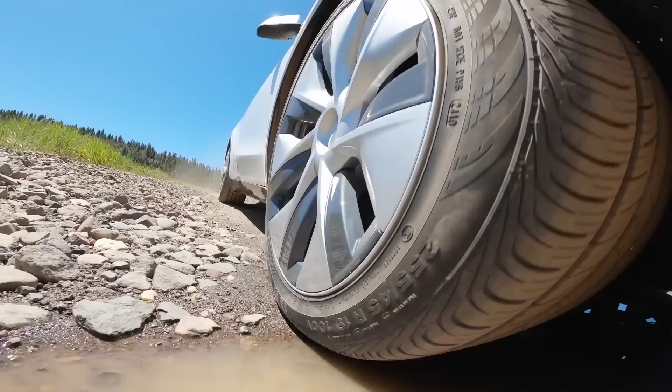And I am bullish because I see that technology is progressing at a pace even faster than I expected, and I am more certain than ever that Optimus will be able to soon staff all production stations. And I am bullish because in a recent video, I showed why it is almost certain that this year autonomous driving will significantly surpass human capabilities.

And I am extremely bullish because this means that after a slow and careful start, Cybercab will ramp like crazy, reaching insanely high volumes from Texas alone and easily replicated in Europe, China, and wherever Tesla wants. If you want me to guess, by the way, expect a Cybercab and Robovan factory announced in India in the next 2 or 3 years.

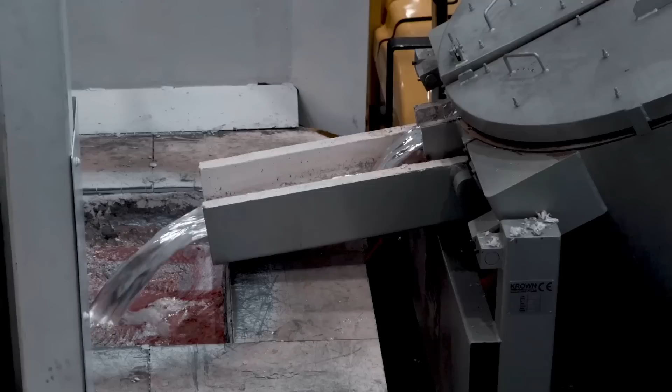And I am extremely bullish because while this video is about Cybercab, I'm keeping my eyes on the prize because Optimus is getting ready to burst out. The technologies are converging, my friends. Right when full self-driving is about to turn superhuman and enable cars with no steering wheels, robotics are about to turn superhuman and enable building cars at breakneck speeds.

Anticipating and orchestrating this convergence, Tesla is readying a factory like no other, an alien dreadnought the likes of which the world has never seen before. We're at the dawn of a new age in transportation and manufacturing, and the first ripple just hit. Because Cybercab isn't just a product, it is a turning point, and the disruptions are just getting started.

What do you think? Which innovations did I get right, and what did I miss or get wrong? Will Cybercab's production line be fully automated on day 1, or will this take several years? And will Tesla's robo-taxi service be the hallmark of a new era, or will it flop like Waymo's ex-CEO now predicted? Let me know your thoughts below.